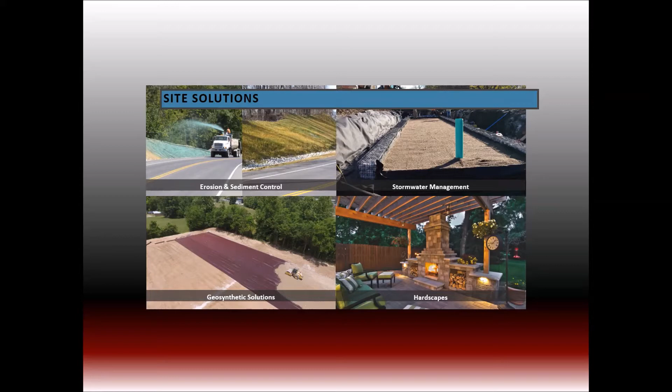And what do we do? Well, we do a whole lot of things. And some of you know us primarily from one of these categories. Most of you don't know us from all of them, but we are experts in all of them and even more than what we show here. So I focus most of my efforts in engineering on the stormwater management side of things. But that bleeds over a little bit into the erosion and sediment control for sure, as well as our geosynthetic solutions. I'm really not involved with hardscapes. Only some of our locations have hardscapes, but all of our locations have warehouses and yards and trucks and delivery experts. So we are the one-stop shop for construction site supplies.

And that can be everything from seed and mulch to silt fence and some BMPs. You see wattles in there. And we have a lot of rolled products, as I said earlier, with the geotextiles, geosynthetics, our geogrids, erosion control blankets, turf reinforcement mats, and on and on. And some of our locations actually have some drainage products as well.

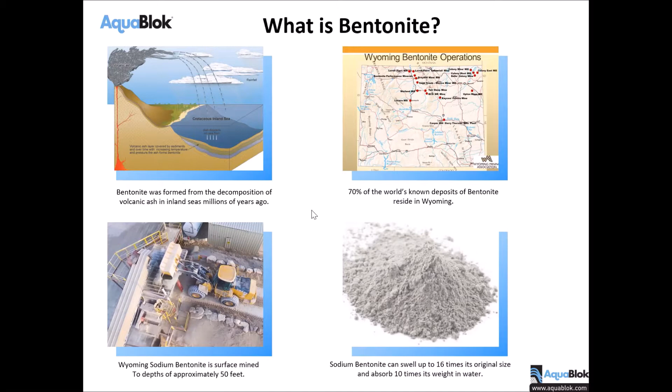Had to clear something off the screen, so on the recording it's not showing up. Thank you. No problem. I got it back, I think.

So there's a couple different types of bentonite. Calcium bentonite is not what we're concerned with. That goes into food products and health and beauty remedies, but sodium bentonite is the magic material. So a lot of different applications for sodium bentonite, used in manufacturing, used in energy and drilling.

If you've ever used geosynthetic clay liner, which is a pretty unique geosynthetic made of woven or non-woven geotextile layers stitched together with a layer of sodium bentonite in between, it can form an impervious liner. And then powdered bentonite in its raw form, if you will, can be used in construction and agriculture. And that's what we're going to focus on, the construction and civil applications for bentonite.

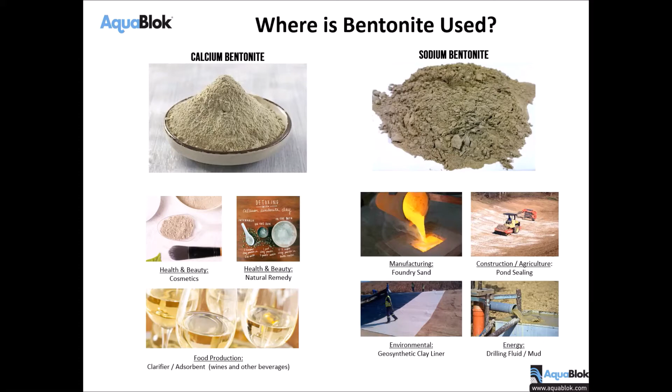But let's talk about bentonite in its raw form first. So bentonite in a powdered form can swell, and it can create an impervious medium, if you will, used in slurry cutoff walls, but it's pretty messy. It can be used to line ponds with, but it usually comes commercially available in 50-pound bags, and that's not fun to use in a pond liner. Can plug wells, but it's pretty messy there.

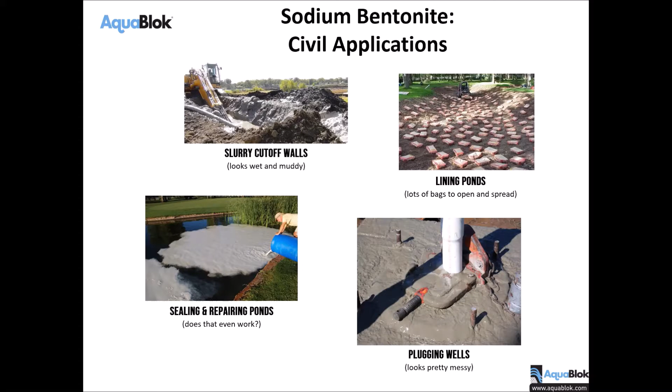And then it can seal and repair ponds, but I'm not even sure if what that guy's doing in that picture on the bottom left is ever going to work. It's just pouring the sodium bentonite and hoping that it gets down to the bottom of the pond. So this is where bentonite kind of falls short, and that's where AquaBlok steps in. So we bill ourselves as kind of the next level bentonite.

What we do is we actually take the powdered sodium bentonite and coat graded aggregate. So this is a number 8 or a number 9 stone, kind of like a pea gravel size and consistency. We use a non-toxic proprietary binder, and voila, we have a composite bentonite aggregate system. So this is coated gravel, and it kind of has the resemblance of maybe a chocolate covered peanut, yogurt covered raisin, something like that.

You could actually scrape off the bentonite a little bit with your fingernail, and you can see the rock underneath in the center. So that's the consistency of it, but it is a uniform distribution system of bentonite. So we're basically using the stone to deliver the bentonite into places that it wouldn't be able to go if it was just in its powdered form. And it's without the mess.

It's self-compacting. So when that bentonite swells, like we talked about, it swells to the inside and it fills the voids of that gravel and creates a self-compacting impervious mass. It's relatively low cost, very flexible, very easy to install, and we'll go through that as a major theme through the rest of the presentation.

We can put together custom blends of different concentrations of bentonite for targeted designs. We can vary and control the permeability, even though it is self-compacting, to get a minimum level of impermeability. If you actually do some additional compaction, we can get all the way down to 10 to the negative 10 centimeters per second hydraulic conductivity.

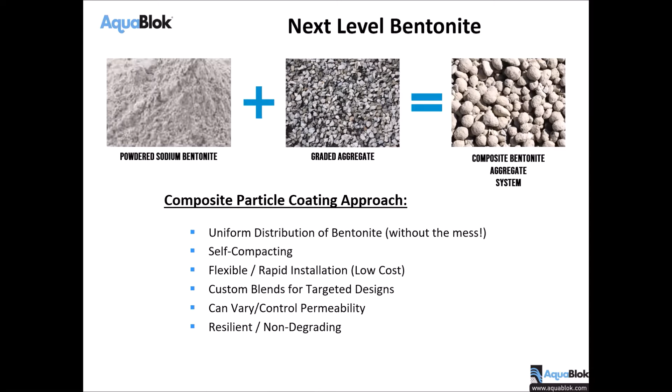So really high performance material there, and very resilient, non-degrading, even self-healing. So it resists seismic forces and degradation from freeze thaw cycles as well. So this is what we consider to be the next level bentonite. How do we do it? What does it look like? I told you it has that resemblance of that chocolate covered peanut, if you will.

So a 1/4 to 3/4 inch average particle size in its dry state, with the powdered bentonite, which is very stable, adhered to the polymer binder, not going to chip or flake off. And then it expands when hydrated. And people ask me, well, does it just expand like a foam or kind of blow up?

And no, what it does is, if it's got a confining pressure around it, in a confining box or trench or area like that, then the bentonite is going to swell to the voids of the aggregate or the gravel and compact the whole mass together.

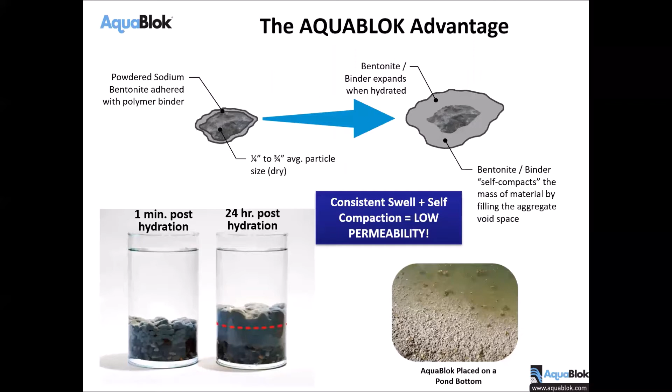You can see those pictures on the bottom left where, right after it gets hydrated versus 24 hours, you can see that swell, but you can also see where it fills up those voids within the entire mass. And then you see what it looks like, a very natural appearance when placed at the bottom of a pond.

So let's go back to regular bentonite, and where is this bentonite presumably better? Well, in cutoff walls and cutoff trenches, we can actually just pour this material right into the cutoff trench without having to do a slurry mixture, without having to deal with all the mess. So in smaller cutoff trenches for hydraulic barriers and preventing seepage, AquaBlok can be a really, really easy and much less messy solution for your applications.

Looking down at the bottom of the page there, you see on the right where bentonite is going in and being conditioned and mixed into the soil to make that soil less pervious. Then you see what we do on the left there, we're actually using a conveyor or a telebelt and just slinging that bentonite coated gravel, the AquaBlok, right on the pond. So much easier to place in a pond lining or sealing solution.

One of the applications I'm going to focus on today is on the top right, the trench dams and anti-seep collars. So we'll talk a little bit about piping, the phenomenon of piping, where water is going to find a preferential path through uncompacted soil, especially around complex shapes like pipes where it's difficult to compact the soil. That's where water finds its way through and causes major problems with underground seepage.

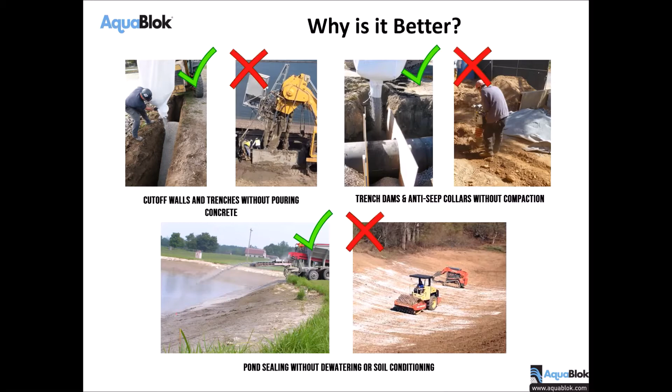So trench plugs, cutoff walls, anti-seep collars, there's a dozen different names for them, but they can be much easier and faster to install using AquaBlok versus compacting soil and placing it around a pipe, or doing a sand bentonite mixture, or even pouring concrete into a form around a pipe. So for trench dams and anti-seep collars, it really is an advantageous material. So that's the AquaBlok solution.

That's the AquaBlok Advantage. The sodium bentonite combined with the gravel, our secret sauce, the non-toxic proprietary binder, creates that composite bentonite aggregate material. It's low permeability, self-compacting, very simple and rapid to install. We can deliver it precisely where it needs to go. And I mean precisely, meaning that it can be dropped right on the area that needs to be plugged or sealed, and not have to worry about moving a liquid mass of something else into an area that's not as predictable to get there. Very easy to deliver.

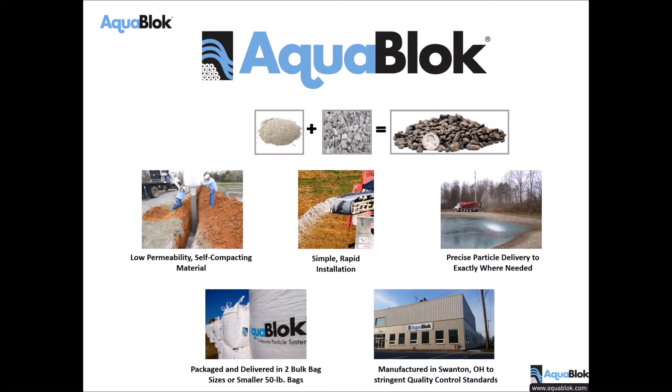We deliver in 2 bulk bag sizes that we sell through distributors like ASP and Quick Supply, Bowman, and Cascade. We also have smaller 50-pound bags for homeowner usage or smaller projects that are sold through those distributors as well. And we're manufactured in Swanton, Ohio, right outside of Toledo, and we have some very stringent quality control standards for the manufacture of this material. So this is AquaBlok, and I'm going to go into some of the performance properties, some of the applications, and then show a couple projects where it's been used.

So let's talk about properties for performance. Why do we make AquaBlok the way it is? What about it makes it conducive for civil infrastructure projects and geotechnical applications? Some of the key geotechnical properties of AquaBlok that I'll go into are how we build it, how we make it, its dry state characteristics. The key property for performance, because what it's made to do is to block water, hence the name AquaBlok. So permeability is a key property. Shear strength and bearing capacity are also bonus properties, if you will, that go along with it.

The way we achieve these properties for performance is through some very specific things. Reliable raw material sourcing. So we source right out of the Lovell area of Wyoming for our bentonite. We have a very consistent manufacturing process with a very good quality control plan and processes to get there, and some very good technical expertise in our lab and our plant as well. We've been making this product for over 20 years.

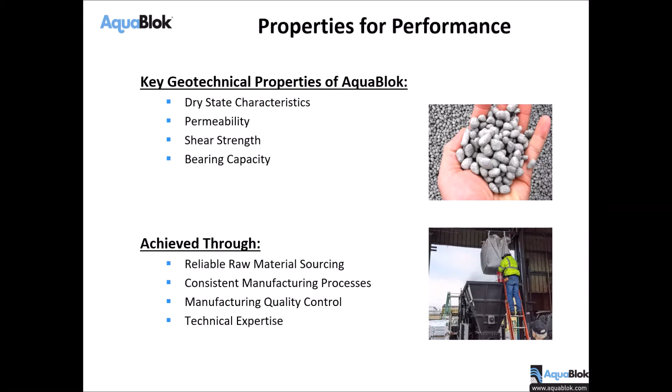Legacy applications for AquaBlok are more in the contamination remediation industry, and so we've used AquaBlok as a sequestration cap for a lot of contaminated sediments. So we've been making it a long time, and probably for the last 10 years, we focused it more on some of the geotechnical applications outside of the environmental contamination or remediation type industry, and more into the civil infrastructure industry.

I want to focus a little bit on those properties that I talked about and dry state characteristics. Bulk density is a very important ASTM standard that we follow to make sure that we're using the proper, very precise concentration of bentonite per stone. So our main product, we call it a 2080 FW, and the 2080 means 20% bentonite, 80% stone by volume, and the FW stands for fresh water. So that's the bulk of our applications.

We do make a saltwater material as well. We use it more in the remediation space, but 2080 FW is the model name, if you will, for our standard AquaBlok product.

I talked about permeability, and hydraulic conductivity is the main ASTM standard that we follow to be able to get results of 10 to the minus 7, 10 to the minus 8, all the way to 10 to the minus 10 centimeters per second in hydraulic conductivity. So you can ensure that when you're placing this as a hydraulic barrier, that it's performing the way it needs to perform.

Shear strength as well, and I think I might have got cut off there on the bottom a little bit, but sorry about that. Didn't mean to advance that yet.

But using the product and some of its friction coefficient characteristics on slopes is very important, because we will use it on 3-to-1 and 4-to-1, sometimes even steeper than 3-to-1 slopes on sides of ponds and basins. So in our triaxial and shear testing, we will know exactly what we're going to get in terms of shear stress and friction coefficient.

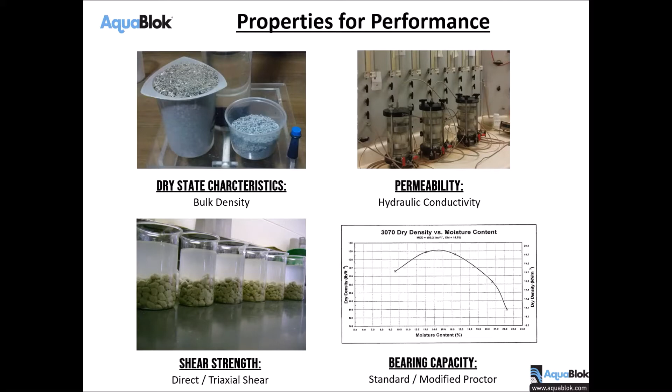So where should AquaBlok be used now that we know a little bit about it? And I would say generically in the top left slide, anywhere where low permeability is required. So I talked about our legacy application of sequestration, isolation, capping, but we're trying to keep water from moving from one substrate to the other. So whether that's preventing seepage through into the groundwater, or sometimes preventing seepage from contaminated groundwater into non-contaminated surface water. So where low permeability is required, AquaBlok can create that low permeable medium.

We've actually used it to repair synthetic liner. Sometimes in lined ponds with plastic liner, UV exposure can cause liners to degrade prematurely. And instead of going in and ripping out entire sections of plastic liner, fixing subgrade and going back and putting in new liner, or even repairing existing liner with extrusion welding, we can go in and actually do a layer of AquaBlok on top of broken or ripped liner and get it back to the permeability standards, which is usually 10 to the negative 7 centimeters per second that it was required to be in certain applications. So as a repair technique over synthetic liner, AquaBlok can be a really valuable material.

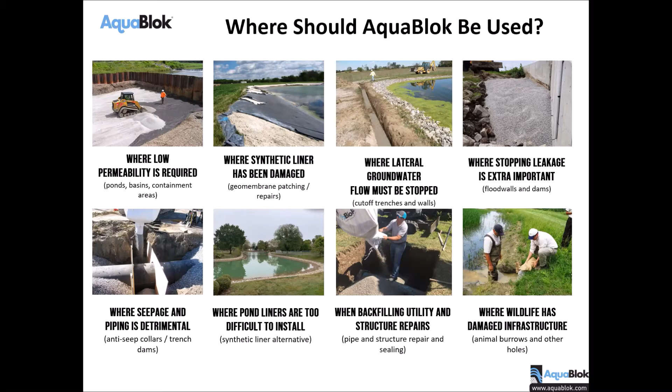I want to go into two key applications that are referred to in the last slide, and we're going to talk about some case studies with both of those. But the first one being pond lining, sealing, capping, and closure. So like I said, in areas where synthetic liner is difficult to install, a lot of times we'll use AquaBlok as sort of a patch or seal material.

So maybe you have a pond that was originally built with clay material, but unfortunately there's a lens of bedrock or limestone or even well-drained sandy material, and that pond just can't hold water. It doesn't warrant an entire clay liner to be installed, and it doesn't warrant the entire synthetic liner to be installed, but there may be some areas that just need to be patched.

What's great about AquaBlok in this application is that, believe it or not, AquaBlok can be installed very, very easily in the water column. So you see those pictures on the top where we're not even draining the pond to be able to get AquaBlok installed. So think about all these applications where you've got water leaking from a pond, don't know exactly where it is, but very, very difficult to drain that pond to get it fixed. And AquaBlok can be a great product to use for that.

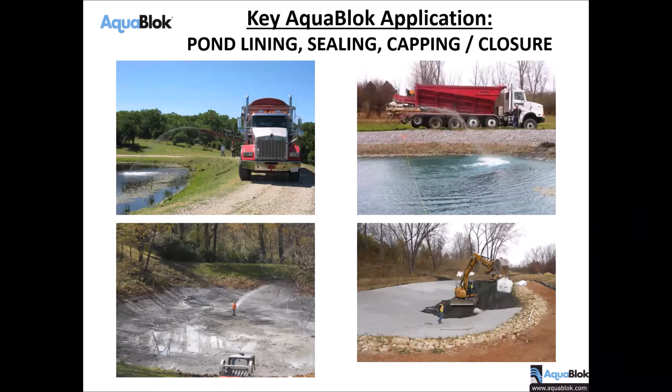Pictures on the bottom where we actually did full scale application of AquaBlok across the bottom and side slopes of the pond. And so AquaBlok can be a great alternative to an imported clay liner that could be 24 inches thick sometimes. And if you think about the cost to import clay from a borrow source that may be more than 100 miles away from a site, AquaBlok can be a very easy to install, less expensive alternative to that.

So along those lines, I want to show you a case study that we did, AquaBlok installation in Columbus, Ohio. This is actually the Franklin Park Pond and Cascades in downtown Columbus, and it was the site of a flower festival many, many years ago, where they came in and actually built a hydraulic system. They had an upper pond and a lower pond, and a system of cascading waterfalls through the middle of it, and a pretty substantial pump system to be able to recycle that water from the bottom to the top and run it down through those cascades.

So it was built in 1991, but since 2016, it just kind of degraded and the cascades started leaking water. The pump system was just inoperable. They went in and did a pretty substantial, expensive upgrade to the pump system, but just didn't have the water because it had all leaked through lenses of sandy material and couldn't hold in its original footprint of pond and cascades. So they evaluated some different materials to use, and synthetic liner was definitely one of the materials.

But if you look at that picture, the difficulty of getting all that rock and shaping that area to be able to install synthetic liner would have been tough. All those stepstone cascades would have been extremely difficult to take out, put liner in, and then put those back, and then worry about damaging your liner when you actually reinstall those cascades.

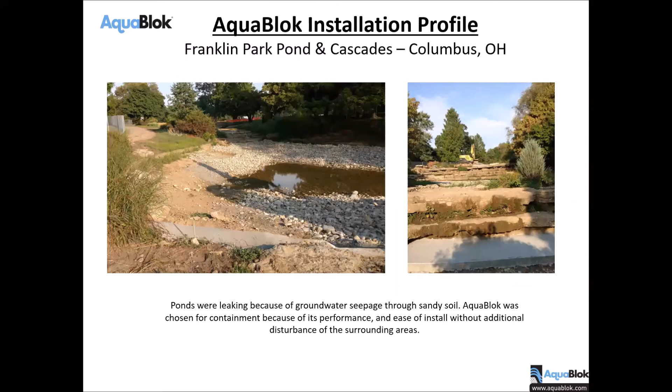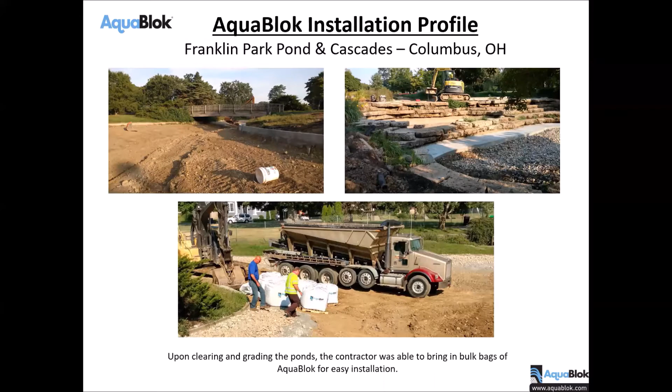So AquaBlok was chosen for its performance, its ease of installation without having to disturb different areas for anchor trenches and things like that. So you can see some of the prep pictures there on the left. They went in and did a little bit of regrading, put some extruded curb type material and concrete around some of the flow paths, did some repairs to the cascades and waterfalls, and then brought the AquaBlok in. Now you can see those white bags, those super sacks, is what AquaBlok is delivered in, and we can deliver those in 2,400 or 2,700 pound super sacks.

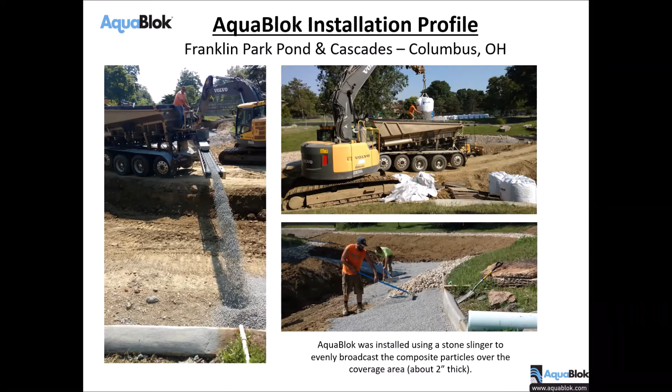And we sort of mix the AquaBlok in around different areas of decorative stone and riprap and things like that, up against the extruded curbs in some of these waterways.

Andy, I'm clicking on the Q&A just real quick. I didn't want to take away controls from you. We're about halfway through, and we've got a few questions. Do you want those now, or do you want to wait till the end? How about I finish just these couple slides on the pond application, and then we'll answer those before we go into the trench dams. Perfect, thanks.

Okay. So I talked again about installing synthetic liners. If you look at that picture on the top left, that's what liner crews will not go in and install in, where you have just nasty kind of muck bottoms and steep side slopes. So being able to park your slinger in there and cover all those areas was a real benefit to the installation. And you can see some of the other areas where the AquaBlok was installed as well.

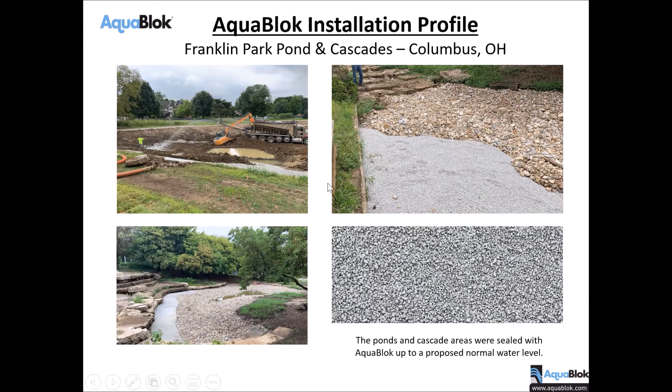So here is a, oh, sorry, I need to take control again. My bad. Here is, oh, I'm trying here, Bill. Sorry. Oh, I'm sorry. I got it now. Do you got it? I think I just had to click the Q&A off. I think you got to do it again. Sorry about that. Oh, that's okay. I was doing behind the scenes stuff.

Okay, so here's a picture of right after the AquaBlok is installed, and you can see it kind of blends in with the pond bottom there with some of the decorative rock up in the upper area of the pond. And then you can see this picture here. This was several months later, where the pond has started to fill back up. And then here's some of the pictures as time goes on, and you can see the pond is full again, and the water is now flowing through those cascades.

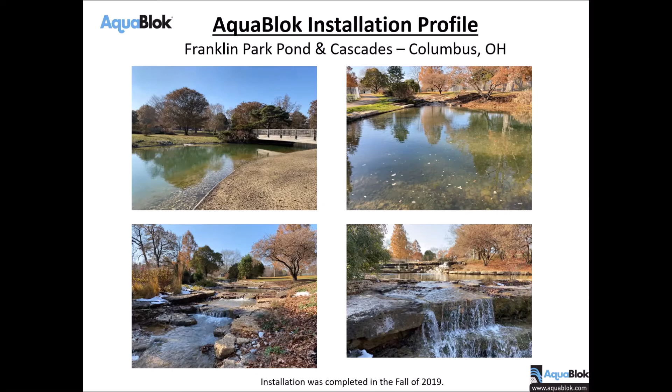I do. It'll be a little bit of back and forth on the controls, because sometimes when I click on these, it takes away control from you. Sure. Donald attends almost all of our webinars, and he asks, how do you keep and store the bentonite in bags dry prior to placement? If compromised with moisture, what problems, if any?

Yeah, great question, Donald. So definitely have to keep the bags dry. In those super sacks, we close the bag up at the top, but we definitely tarp it in transport. And then when they're stored, if they can't be stored indoors, we definitely need to have some good tarping over it while it's stored outdoors. Now, we will deliver on pallets, so that'll keep it up out of saturated ground, but you definitely don't want to store it in any standing water. And you definitely want to have some tarping over it before it gets used.

But if you do that and you do it right, then you can leave it outside for several months before it needs to be used. And our salespeople are very, very comfortable with this. We carry it in a lot of our branches, and our guys are really good at telling the contractor that picks it up how to take care of it. So we've not had any trouble.

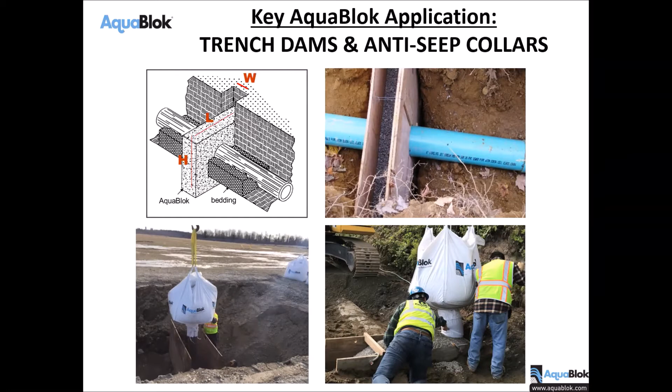All right, so let's talk about trench dams and anti-seep collars, because here's where AquaBlok can be a great advantage. So using it for these applications: principal spillways through dams and stormwater ponds, oil, gas pipelines, lots of utility construction, storm sewer outfalls, large box culverts. Depending on the municipality or regulatory district, these anti-seep collars can be a pretty frequent placement criteria. But it can be very, very easy to install, no compaction required. It's just easy to pour in, do it in multiple lifts if need be.

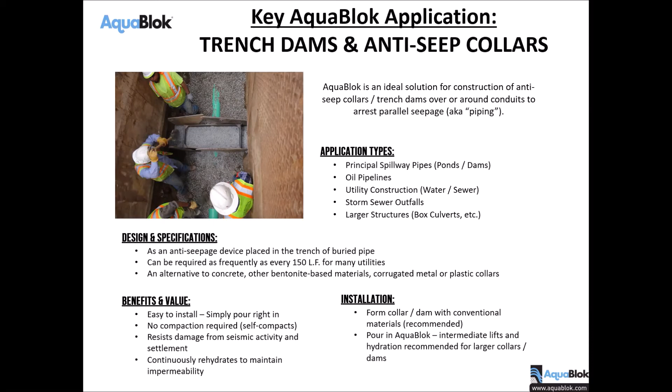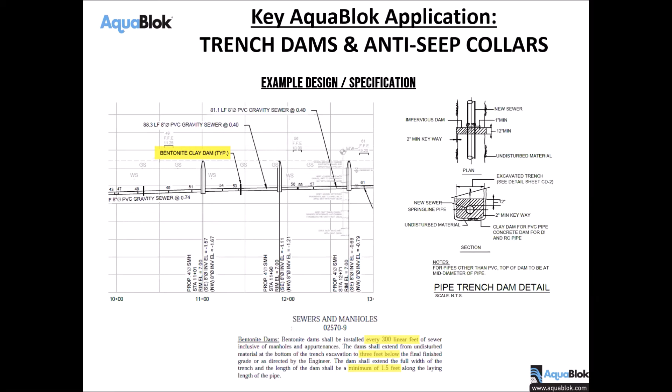And we make it easy for you. Bill and his team can give you these, but this is our typical detail and our specification language. So we even put in some criteria for how thick the anti-seep collar should be based on pipe diameter, how high it should be, the dimensions around it based on what kind of cover is going to be over it, and then probably most importantly, the spacing of it based on the type of utility, the type of grade, the type of soil. So it always is preempted by what the engineer will design. But if the engineer needs some guidance on this, we're certainly happy to help with our standard specifications and details.

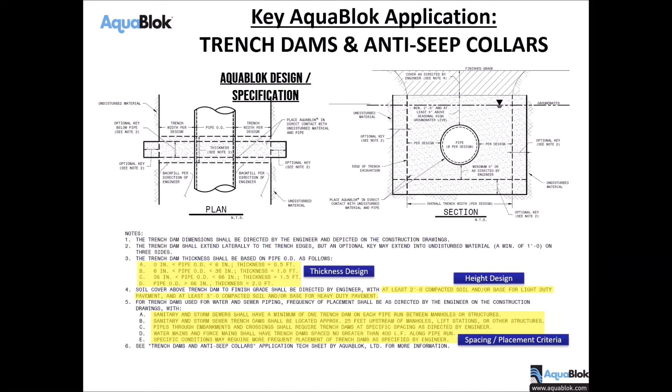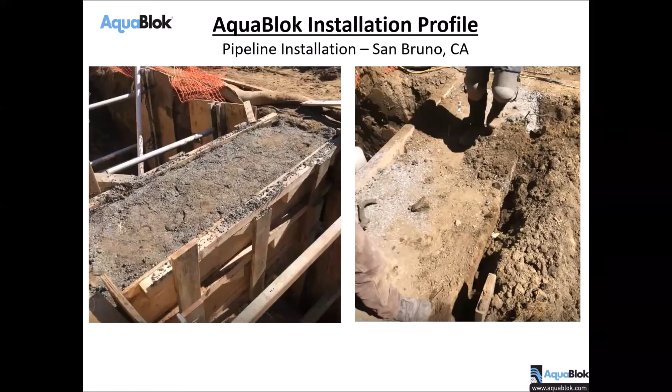So here's a couple application examples. This was an anti-seep collar done on a large water transmission line for the San Francisco Water Authority. And just want to show this. This was a little bit overkill in the form. The form does not have to be this elaborate to be able to put the AquaBlok in. But if you do, this is what we really don't want to see. Do not pull the form away before you backfill the trench. Fortunately, they had hydrated AquaBlok enough where it actually stands, and I think this is a testament to the strength of the material. It actually stood without having the support of the backfill trench there. So that's just one example of where it was used.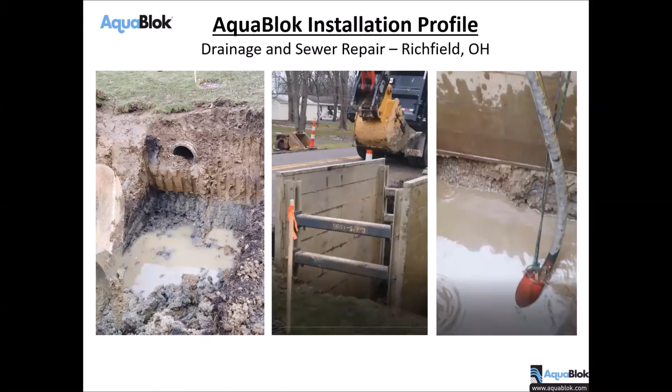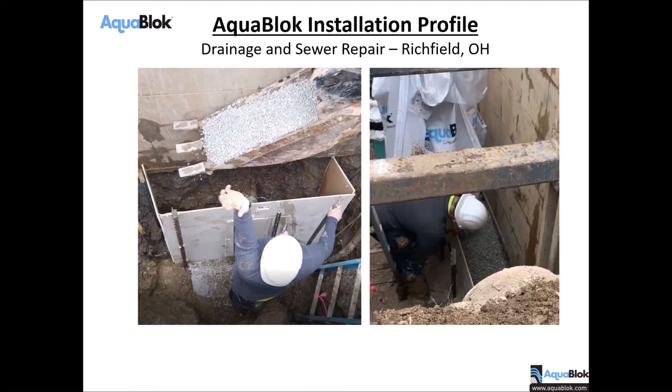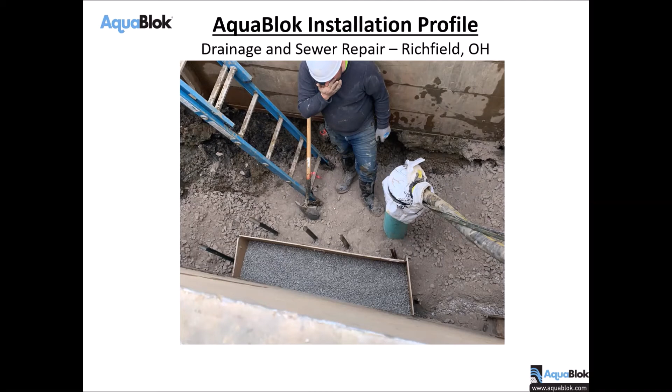This was a project that we recently did in Ohio with a lot of seepage going through some sewer laterals. And I just want to show you how easy it was to form this up. They actually used some drywall to keep a little box there to be able to put the AquaBlok in, and just put the AquaBlok right in from the bucket, and then was able to cover up around that lateral and prevent that seepage, at the edge of the trench box there in this application.

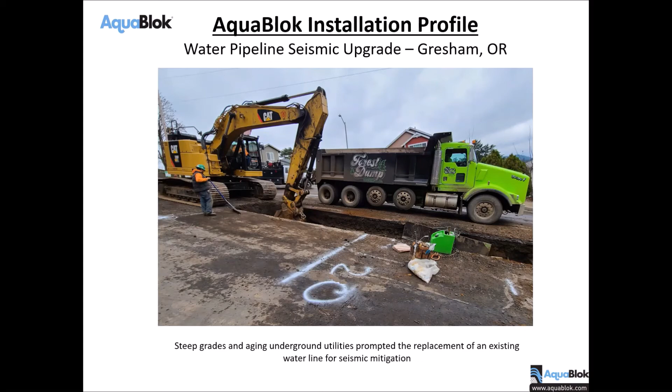But this is the signature project that we want to talk about. So this was Cascade Geosynthetics, and Travis Reel, who was going to be on with us today, but got called out to some meetings. This was a project that he and his team worked on, sold through a contractor up in the Pacific Northwest called Tappanee. They had a lot of steep grades and aging underground infrastructure, and really had to move quickly to get these anti-seep collars installed. And the design and specification was a bentonite dam.

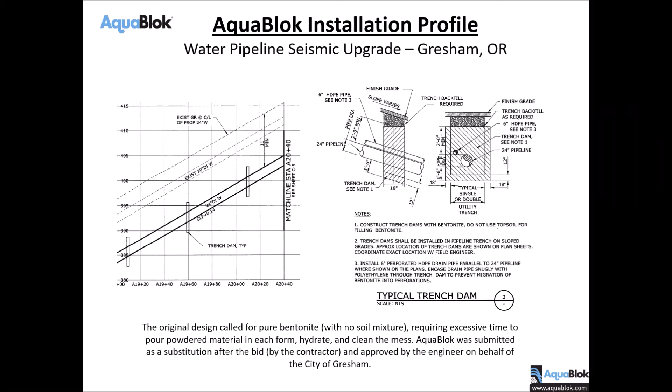So it was a pretty generic bentonite specification, which would have required a lot of mixing and compaction of that material. You can see the steep slope on this 24-inch water line, and these trench dams were in some places spaced pretty close together in the trench. So we're looking at that. But here's the thing, and I want to talk about this in a minute. We submitted AquaBlok as a VE, value engineered proposal, to substitute for just standard bentonite, and the engineer was happy to accept it, and so was the municipality.

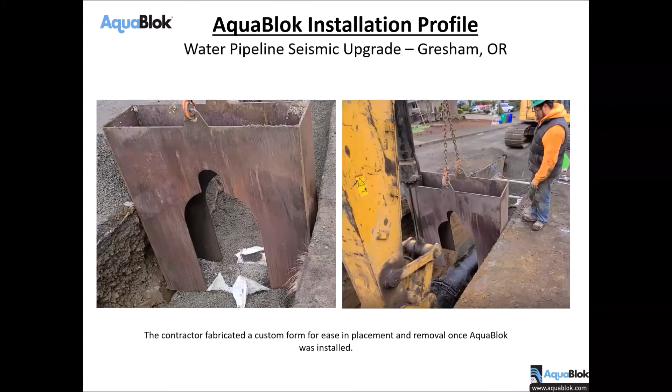So what the contractor did, and this was ingenious, was actually fabricate this form, this reusable and movable form. So they actually put hooks on it, and were able to pull it out and just set it right over the 24-inch water line, drop it down, and then fill the AquaBlok right into it, and then pull the form out and move it to the next spot and just pour the AquaBlok in. This was the key value proposition for this project.

We're able to just empty that bag suspended from the loader right into that movable trench dam form. Just a matter of seconds. So this was an actual quote from Cascade's contractor customer. He said that they've been doing these trench dams, and it's a process that usually takes them about an hour to do each time they go in, and that's probably a quick one. He said that now that he's got AquaBlok to do this, he's reduced what was taking an hour down to 11 seconds using AquaBlok. So very, very happy about how easy it was to install and get these things going.

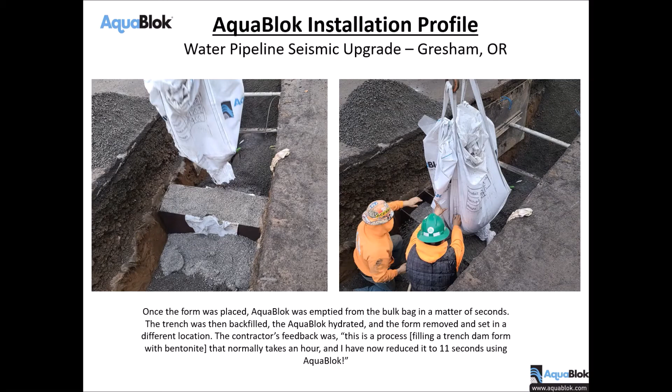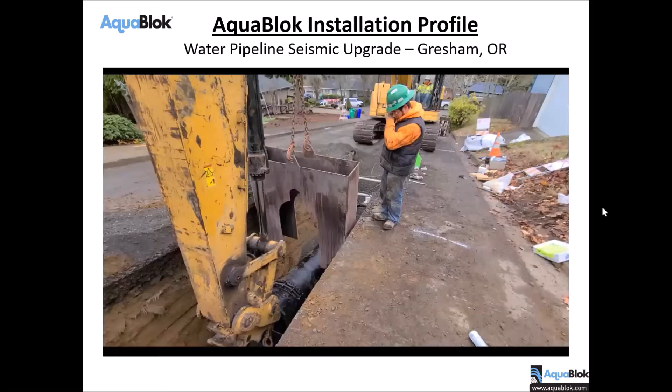I want to show a couple more pictures there of the construction. You can see that form there going over the water line. But here's a video that Travis put together. It looks like it's going a little bit slow, a little bit of latency there, but you can get the idea of it. It's just dropping the form right over.

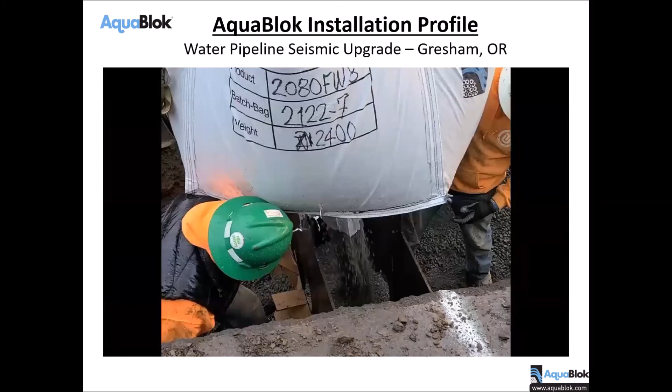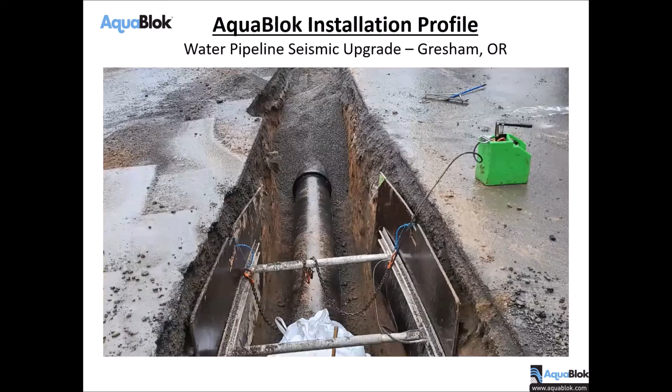Now, the key to this is what they figured out in doing this was that they went in and placed the form in, and then they poured the AquaBlok into the form. I'm sorry, they did not hydrate the AquaBlok. They actually poured it in. They backfilled the trench first, and then they pulled the form out before they got any water on the AquaBlok. And what they found was it was much easier to remove the form when it was still a little bit dry. But then the saturated soils and the water that they put on it got the AquaBlok to hydrate and set very, very easily after that was pulled.

Great project, and now Cascade is looking at doing several more of these with different contractors up in the Pacific Northwest. So just a testament to how great the product has worked for them, and we believe it can work just as well for ASP and Quick Supply and Bowman and other places as well.

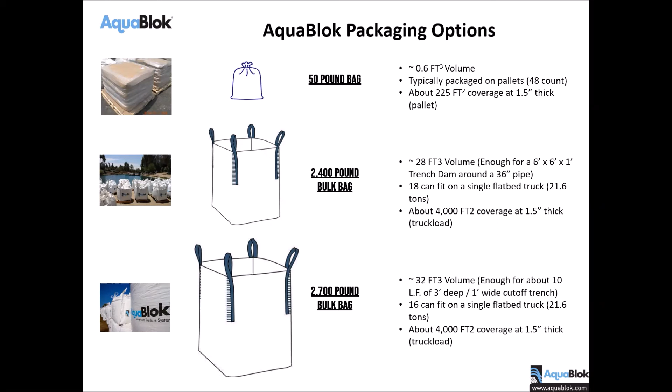So to wrap it up, these are the delivery options for AquaBlok. We do it in 50-pound bags, and a 50-pound bag does not go a long way. That would be just plugging some very small, maybe animal damage holes. But the 2,400 and 2,700-pound bulk bags, we can fit 18 of the 2,400-pound bags on a truck and 16 of the 2,700 pounds on a truck. Now, those can be purchased directly from your distributor in the area, ASP, Bowman, Quick Supply, or Cascade. We can work with them to drop ship directly to the job site sometimes as well.

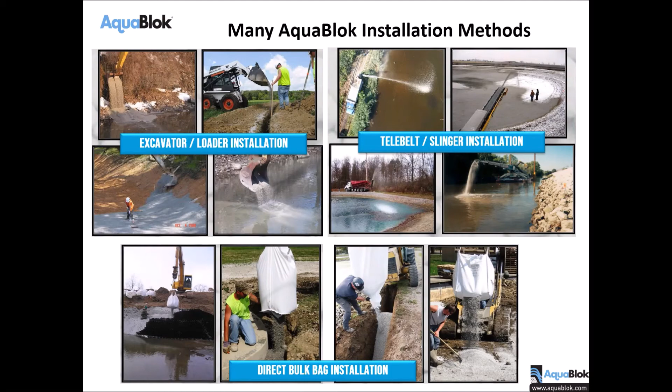Like we talked about, a very easy installation. If you've got the ability to put it into a bucket and drop it in directly, that's fine. The telebelt slinger installation for broadcast over a pond is the best way to do that. And then just simply dropping it right into the cutoff trench or the repair area or the trench dam is easy to do as well.

Lastly, if we get into some very large jobs, we're talking about huge flood control structures, things like that, we actually can and have been able to go out and set up remote batch plants at the job site itself. Now, we'll still work with the distributor to make this happen, but it cuts down on the shipping, and we can import the materials directly to the job site and make the material. So we actually make our technology mobile in these types of situations.

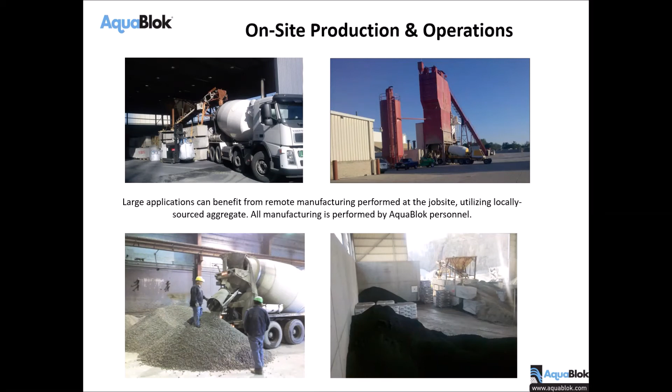So that's all I've got, Bill, but I certainly would love to answer some more questions. Yeah, for sure. So before I go on to my closing slides that just wrap this up, I'll pull up the Q&A, and you already answered a couple of good ones. And I don't know if you'll see these questions appear on screen, so let me read them to you.

Sure. Mark asks, do you have any thermal conductivity values? Does that ever come up? I've never heard of it. Thermal conductivity values, no, Mark. I'll have to go back and look at that. I'm trying to think of what context here. In terms of resistance to freeze thaw cycles? Maybe he could elaborate. Maybe we can get back to it. We'll ask Mark if he wants to add anything to that, because I've never heard that question. Yeah. Dennis asked, is it cost competitive with granular bentonite in dry installations?

That's a good question. So, you have to look at it apples to apples. Granular bentonite comes in smaller packages and less of it can be used, but yet it has to be mixed with something. It has to be mixed with water, soil, placed and compacted. So pound for pound, our material is going to be more expensive than granular bentonite.

But if you look at the total mixed cost to install, you're going to find in some applications, AquaBlok can be much less expensive than installing bentonite. But a bag of powder bentonite is going to be cheaper than an equivalent bag of AquaBlok.